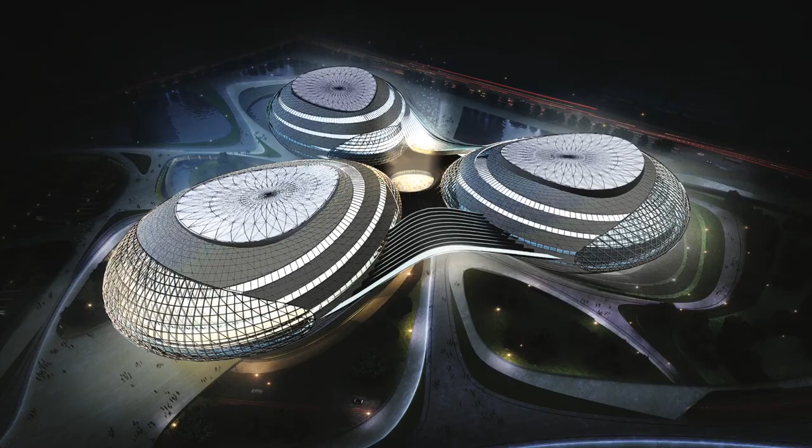This new project in Doha will promote Qatar as a world frontrunner in medical infrastructures with the opening of a new generation of hospital.

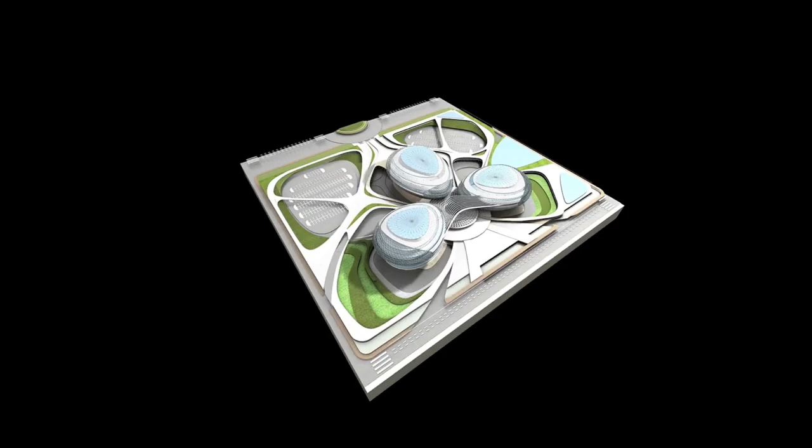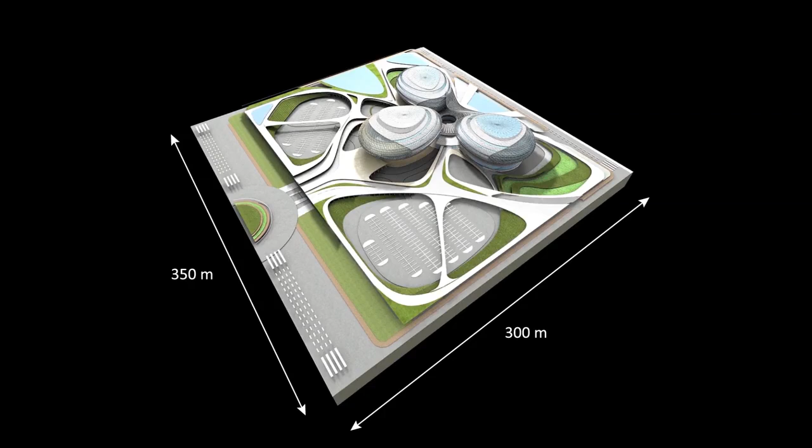The proposed project is designed on a model site of approximately 100,000 square meters, 300 meters long and 350 meters wide. The site's dimensions allow for possible future expansion by the construction of satellite structures, additional hospital units, hotels, housing, etc.

The architectural design is defined by three autonomous medical entities: the General Surgery Hospital, the General Medicine Hospital, and the Mother and Children Hospital, fully self-operating.

The exterior areas of the project are organized on two superposing levels with a maximum height separation of 6 meters. The lower level, where all the road systems and parking areas are located. The upper level, developed like an uprising of the natural ground to reach a maximum height of 6 meters, corresponds to the pedestrian walkways and landscaped esplanades.

We chose to create two separate topographic levels on the site in order to rationalize the complex flows generated by the hospital's activities. The upper level site is made of pathways, light, and airy walking bridges, which also help create shadows for the lower level drop-off areas. The landscaped areas and water basins will also help to cool off the curbside drop-off areas in a permanent and natural way.

Road accesses will be directly connected to the site via direct deviations from the main road traffic. All road accesses are organized at the topographic level of the city road system and define the lower reference level, called the lower level site of our project.

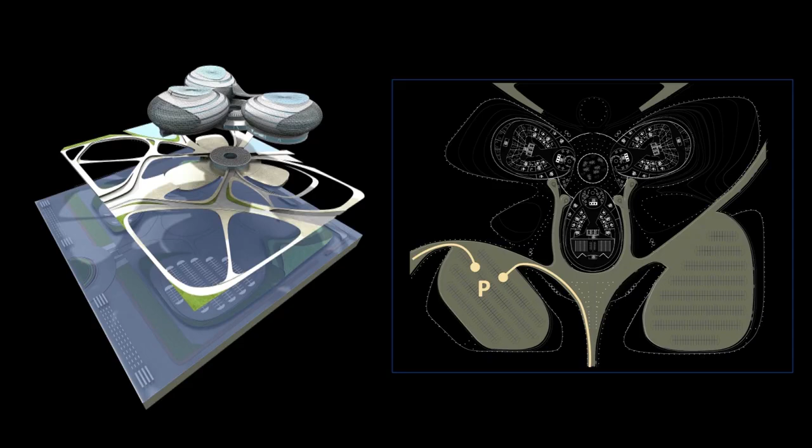Different traffic flows will be organized with road signs and color-coded ground signs. The visitor's car flow will be distributed in 3 directions: access to the parking area of the general medicine and general surgery hospitals; access to the parking area of the Mother and Children Hospital and accompanying persons to the consultations and emergencies; and access to emergency and VIP drop-off area.

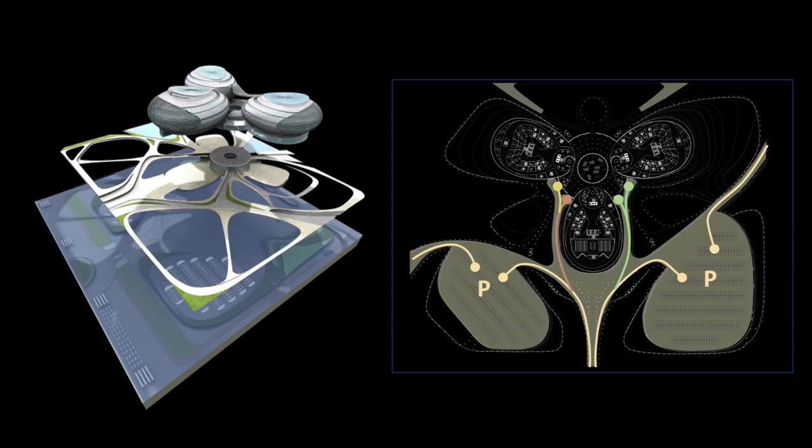At this stage of the design project, a basement parking area is planned below the hospital structure, pending further studies on the geotechnical characteristics of the site.

The lower reference level is directly connected to the medical technical ring and emergencies. Private road accesses are restricted to the hospital staff and emergency vehicles, separated from the public car flow at the site's entrance where security access gates will be implemented.

Several restricted access gates will be dedicated to emergency access on the entire site's perimeter in order to optimize the distances to the emergency drop-off curbs and minimize the patient's admission processing time. The hospital staff will have dedicated access to a specific staff parking area.

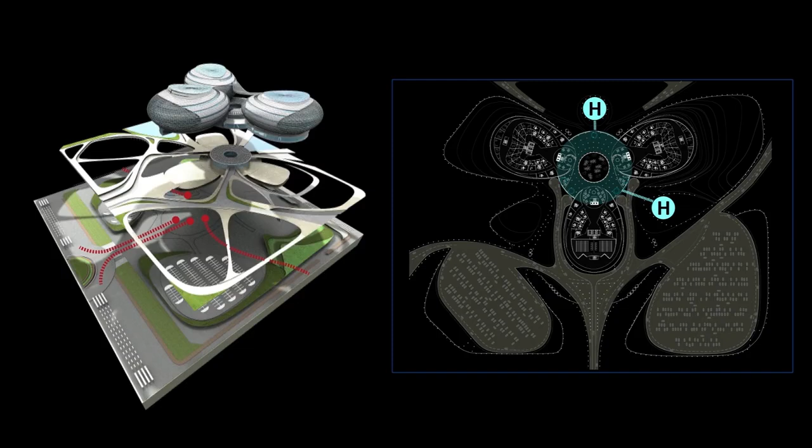A heliport will be located next to the emergency area for a fast and easy access of the stretchers. A second heliport can be located on the site if necessary and would be dedicated to the Mother and Children Hospital.

Pedestrian flows and accesses are located on the upper reference level of the project, called the upper level site. The pedestrian flows are organized around esplanades, gardens, water basins, and pedestrian bridges, starting from the lower level and accessing the upper level along very light slopes, barely noticeable by the pedestrians.

The pedestrian pathways and walkways start at the lower level, along the curbsides defining the site's limits, and slowly climb up to the upper level above the exterior parking areas and the site's road system. The upper level pathways will lead the visitors to the core of the building, organized as an indoor public square connecting the 3 functional buildings.

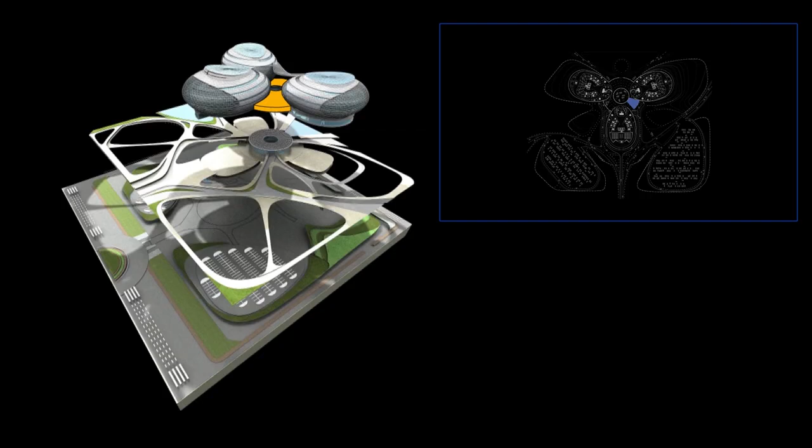Restaurants, retail stores, information desks, and services areas are organized around this central plaza. The central public plaza represents the core of the building, which unites the 3 hospitals to create one unique ensemble. This plaza, or hall, located above the medical technical ring and the emergency area, is a round-shaped interior space.

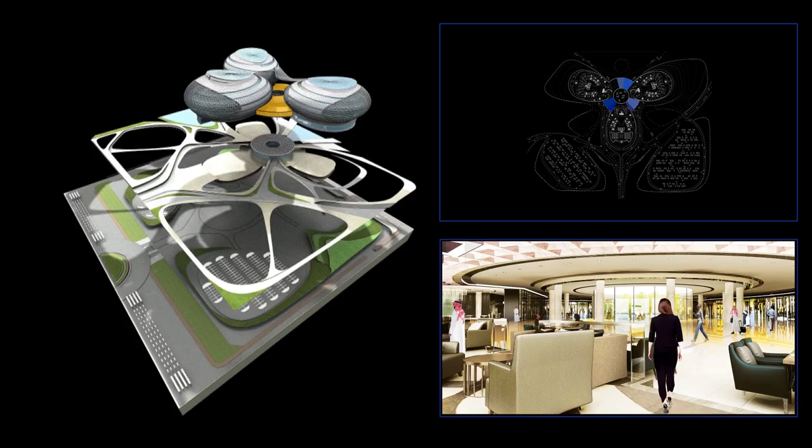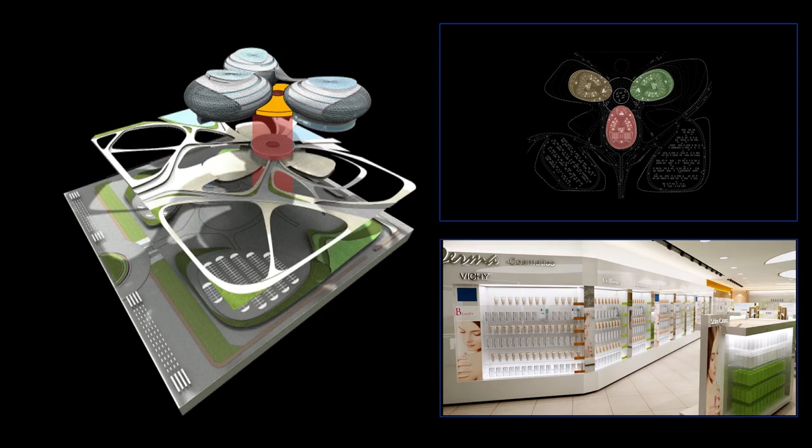A landscaped patio is located in the center of the hall. The round-shaped hall has a radius of 36 meters and an area of 3,600 meters squared. The hall is organized as an urban space where one can find retail stores, restaurants, rest areas, spiritual areas, as well as the general admission offices and desks.

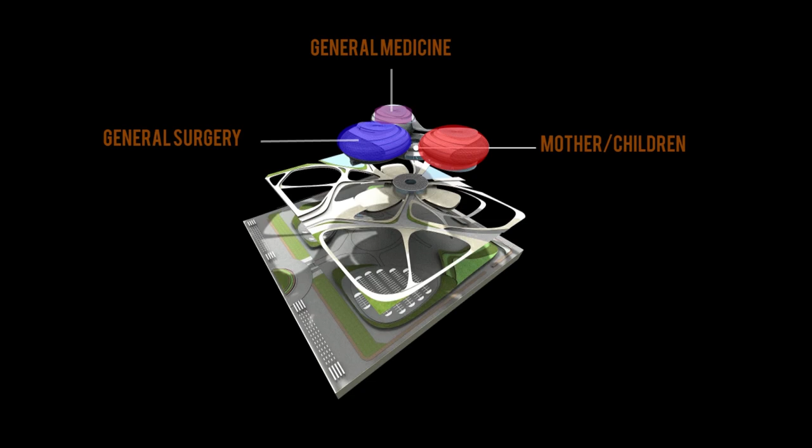From there, the public flow is distributed towards each of the 3 hospital units: general medicine, general surgery, and Mother and Children Hospital, where the public can find circular information desks from where they can access all of the unit's departments through organized and secure accesses.

The common medical technical area is located on the lower level of the building, directly underneath the public plaza, with direct access from the emergency drop-off curbsides, VIP drop-off areas, and the heliport. The ring has a height of 6 meters and a surface area of 13,000 meters squared.

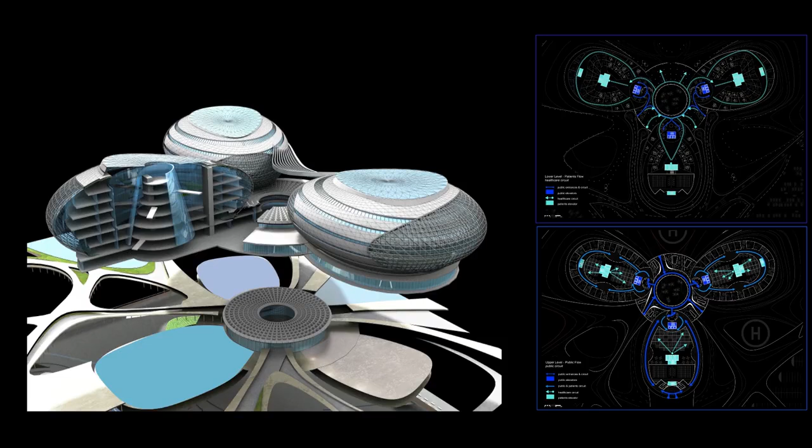It is formed by the basements of the 3 hospital buildings connected by a central ring used as a logistic hub to dispatch patients and medical staff to and from the 3 hospital buildings.

This common medical technical base includes in one unique structure all the hospital common use functions: emergency services, medical laboratories, medical imaging centers, the pharmacy department, surgery operating rooms, and the resuscitation department.

The main advantage of this common base is the optimized and rapid access to it from all 3 hospital units, thus reducing sharply the time for intervention compared to a more classic linear approach.

Each of the 3 hospital units is directly connected to the common medical technical base via a medical functional hub, which is a vertical structure similar to an airport control tower. Those medical control towers host in each of the 3 units of the hospital the nurse offices, the general surveillance areas, and all medical zones necessary to the functioning of each department.

Our proposal includes a 55,000 meters squared hospital facility dimensioned for 300 beds, with a possibility to increase its capacity to 500 beds. We have subdivided the hospital into 3 coherent hospital units.

The General Surgery Hospital, with an area of 13,000 meters squared, is the largest unit of the facility and integrates all types of surgery departments. The General Medicine Hospital, with an area of 11,000 meters squared, hosts all medical specialties, consultation, and service areas.

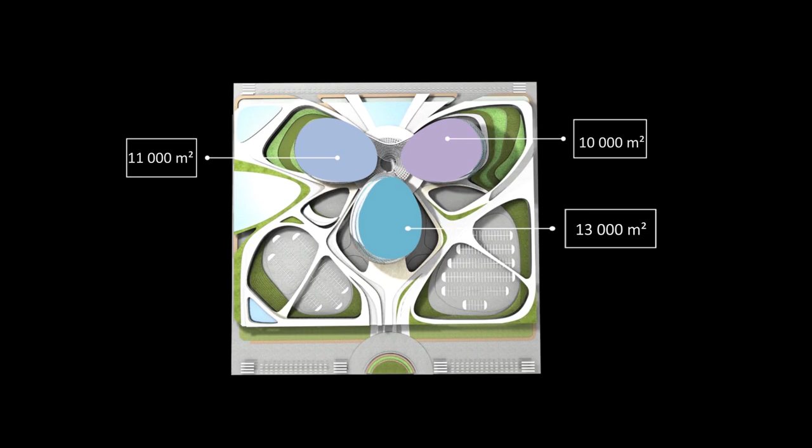The Mother and Children Hospital, with an area of 10,000 meters squared, is a fully self-operating unit, including pediatric emergency rooms, surgery operating rooms, and a pediatric resuscitation department. All gynecological, obstetric, birth and labor rooms, and staff rest areas are in this self-operating hospital unit.

Each one of these 3 units is hosted in an autonomous ovoid-shaped building perforated with a central atrium. The 3 units have a similar morphology defined by an elliptical plan 85 meters long, 56 meters wide, and a height temporarily established at 35 meters at this stage of the project.

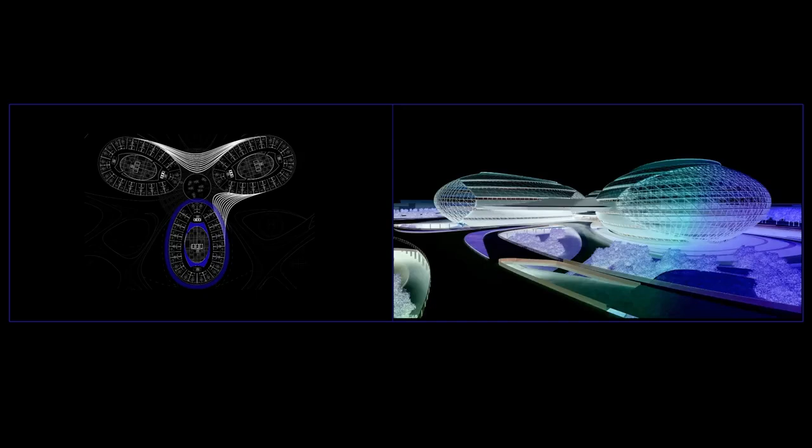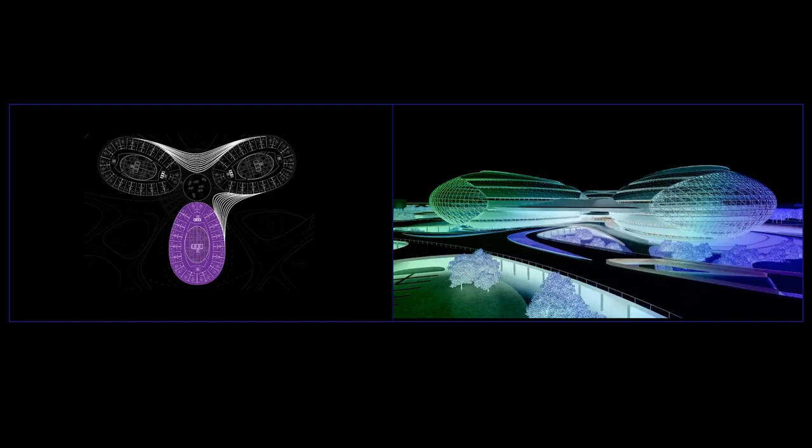This architectural morphology, very compact in its design, provides the following advantages: optimization of the walking distances and times, centralization of the medical functions, natural lighting inside the building, distribution of the floors on several medical departments for a better modularity, possibility to sectorize within each department—men's bedrooms, women's bedrooms—optimized and secure flow orientation, and optimized energy management with a compact shape.

Each unit is rooted on the common medical intervention base, the ring. Each unit is composed of a ground floor accessible through the central plaza, upper level, and 6 upper floors. The medical departments are distributed by the specialties on each of the unit's floors.

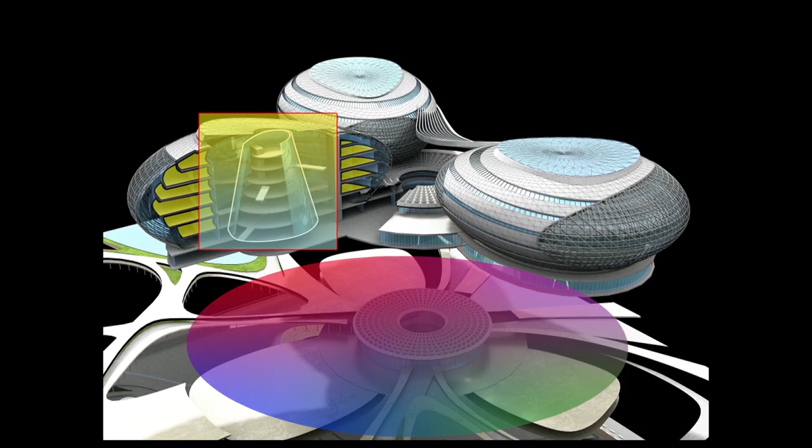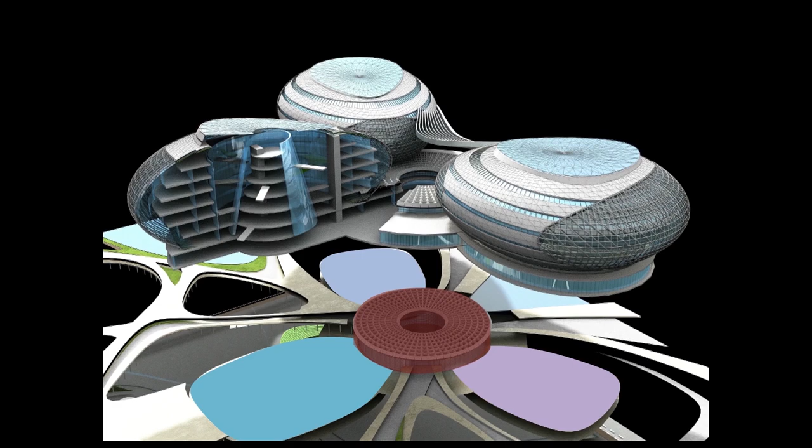Each floor is perforated in its center by an atrium and crossed by a medical tower, an internal architectural structure with a conical shape, linked to the rest of the floor by walking bridges, lit with natural lighting through the atrium. Those medical towers, just like an airport control tower, include on the ground floor resuscitation rooms connected to the surgery operating rooms located on the common technical basement floor, the ring, and allow access to each of the unit's 6 floors to medical staff, logistics, services via elevators and lifts.

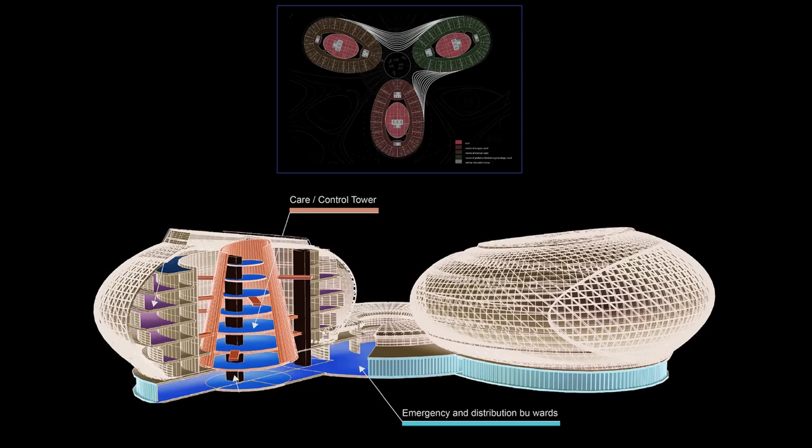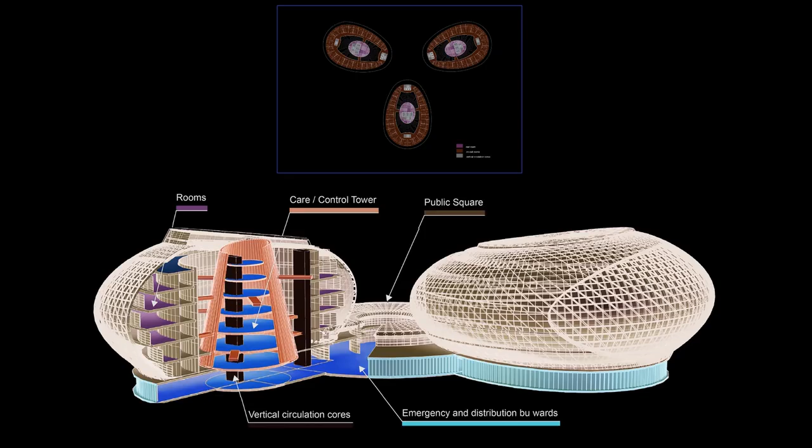The lifts and elevators are for staff use only and are located inside each medical tower. The public use elevators are located in other vertical flow hubs located in the lobbies of each unit. On the upper floors of each building, we find the staff rest areas and a technical floor just under the roof, which covers the technical amenities of the building, electrical, thermal, etc., from an aerial view.

Patients' rooms are distributed on the floor's perimeters of each one of the 3 hospital buildings. The general design of each unit allows a distribution of the rooms in a men's sector and a women's sector for each medical department. The patient's rooms will be equipped with the highest standards in terms of medical and technical equipment, as well as their general design equipment.

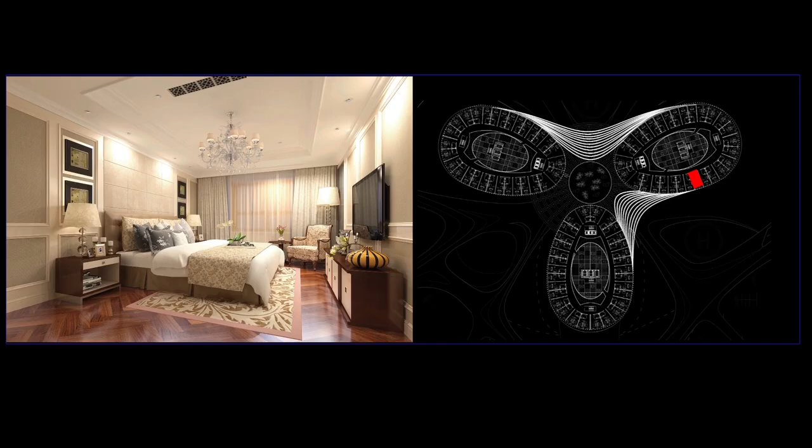They will be connected to the central services area of each floor by a walk path lit by the central atrium. The rooms will have different dimensions and characteristics, but they will be designed in reference to the high standards of Parisian luxury. Each department will have premium patient suites, including VIP services, and all the space necessary to accommodate extra staff and families.

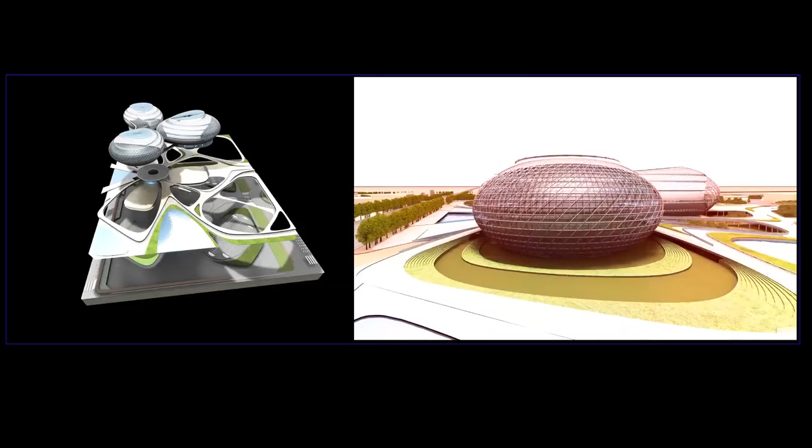The conference center is located at the upper level, entrance level, of the General Surgery Hospital. Its main access is from the esplanade and specific access walkways from outside. One can also access it from the main entrance hall, the public plaza in the General Surgery Hospital lobby.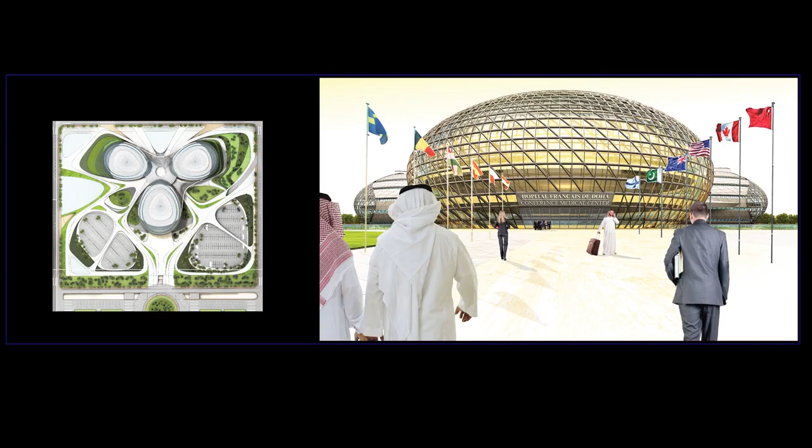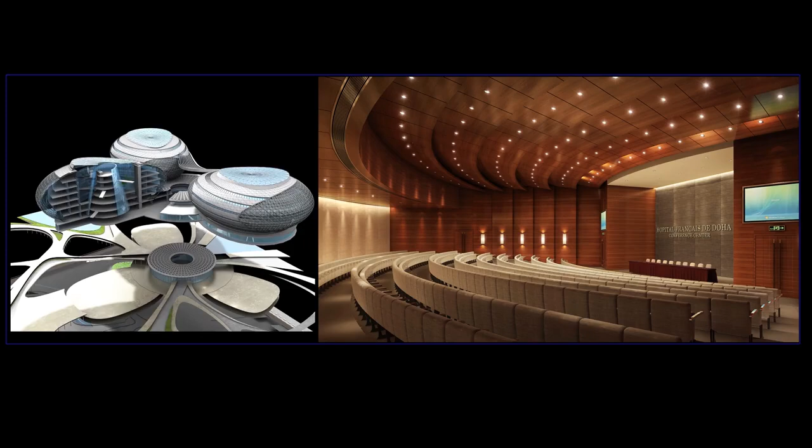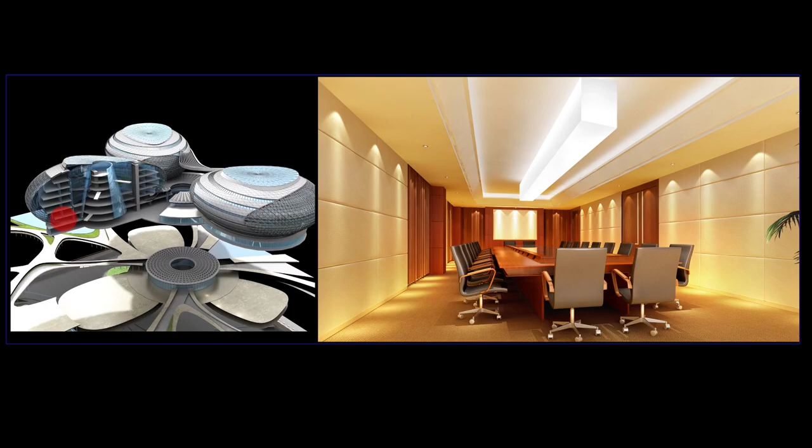It includes a large 500-seat amphitheater, which can be divided into 2 independent amphitheaters. This auditorium is equipped with state-of-the-art audio and video equipment necessary to host international conferences. An audio translation system will be included on every seat. A polyvalent space that could be used for exhibitions or receptions can also be divided into smaller areas for meeting or small conferences. This conference center is ideally designed to handle local or international events all year long.

Each ovoid-shaped building, covered with a stone and white marble cladding, is opened at the edges to 2 large structural glass canopies, with multiple skins connected by glass lateral openings.

Those large glass surfaces, coupled with the central atrium, create convections of the air-conditioned cold air added to the cold air coming from the rooms in the lower floors, with the hot air in stagnation on the surface of the building's skin. This process, associated with the geothermal energies, creates a bioclimatic cycle, regulating warm air and cold air convections to create a healthy and environmentally friendly atmosphere with a permanent air renewal cycle.

Outside, the aerial structures connect the buildings. Those structures create shadows on the ground and are covered with photovoltaic cells. Those solar cells, added to the ones on the building's roofs, create a large photovoltaic energy generator that drastically increases the sustainability of the building.

Its architectural and urban evolutions positioned Doha as the regional capital of culture, knowledge, and modernity. The construction of Doha's French hospital, with its innovations and avant-garde characteristics, will identify Qatar as a world leader in medical infrastructures. At the crossroads of human and urban, the Doha hospital will lead the way to hospital infrastructures worldwide.

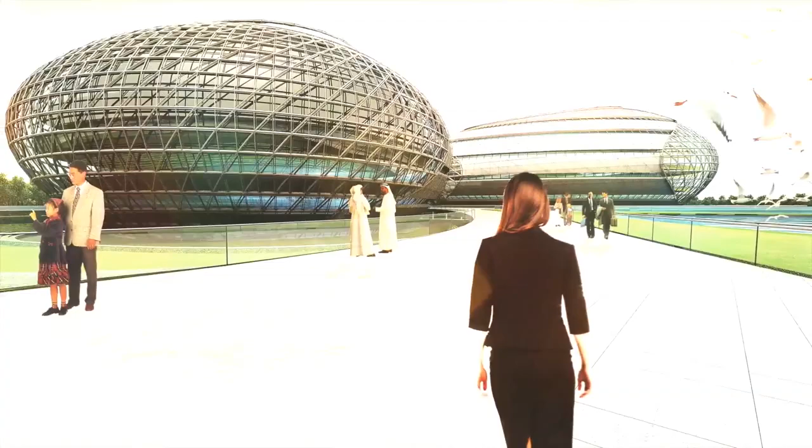Like three precious stones shining in the desert, its architectural design will be the showcase of medical knowledge and research, and patients' and families' well-being and serenity in their healthcare experience.

When the sun sets on Doha and the surrounding desert, this building, dedicated to modern medicine, will become a new lighthouse for the city. Like a heart beating at the rhythm of the city's perpetual activity, this city within the city, home of a well-being-oriented research center, will indicate by its permanent twinkling that here, new hopes for humanity are birthed every day.